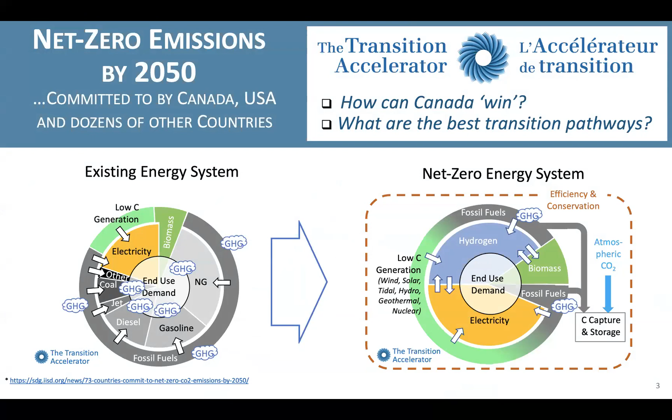I'd like to begin by just a word or two about hydrogen, why we're talking about hydrogen. I think we all know that Canada, the United States, and dozens of other countries have committed to net zero greenhouse gas emissions by 2050. And in the Transition Accelerator for the last 2.5 years or so, we've been trying to identify how Canada can win in transition to net zero, and what are the best transition pathways.

So when you look at the net zero emissions, and you look at the emissions we have in our existing energy system, it's pretty clear that a lot of the emissions, in fact the majority of the emissions, are coming from end-use carbon-based carriers like natural gas, gasoline, diesel, etc. And it's pretty clear that in a net zero future, it's going to be very challenging to continue to burn these kinds of energy carriers, putting greenhouse gas emissions into the atmosphere distributed across Canada. So we are going to have to change those energy carriers.

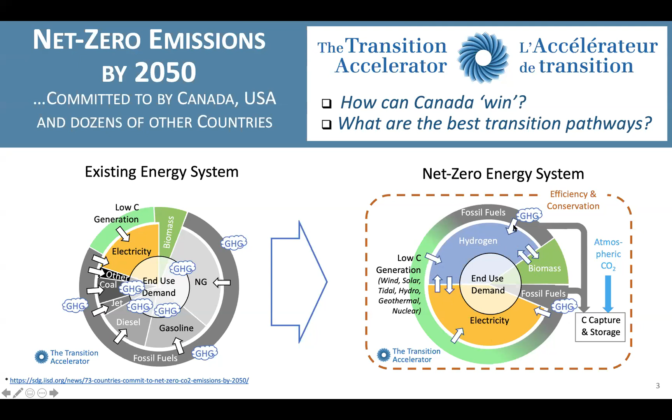The world is rapidly coming to a consensus that a net zero energy system will look something like a diagram on the right-hand side of this chart. A significant increase in the role of electricity as an end-use energy carrier, and an increased role for biomass perhaps. But the new one is an energy carrier that doesn't contain carbon, and that's hydrogen. These energy carriers, both electricity and hydrogen, have to be made with minimal or no greenhouse gas emissions.

So why hydrogen? Well, some sectors need chemical, not electrical, energy carriers. And Mayor Nenshi mentioned some of these: freight transportation, heavy industry like steel making, et cetera, and space heating in cold regions and large buildings.

Now often it's positioned that hydrogen and electricity are competing with each other for market share, and I would argue it's not that at all. What it is, hydrogen and electricity complement each other, because you can make hydrogen from electricity, and you can make electricity from hydrogen by splitting water or putting it back together again, by combusting the hydrogen. Hydrogen can also be very valuable long-term storage for energy, a non-carbon-containing energy store. Another benefit of hydrogen is that it can actually enhance your biofuel production and the productivity of biofuel production that you get from lignocellulosic biomass, for example.

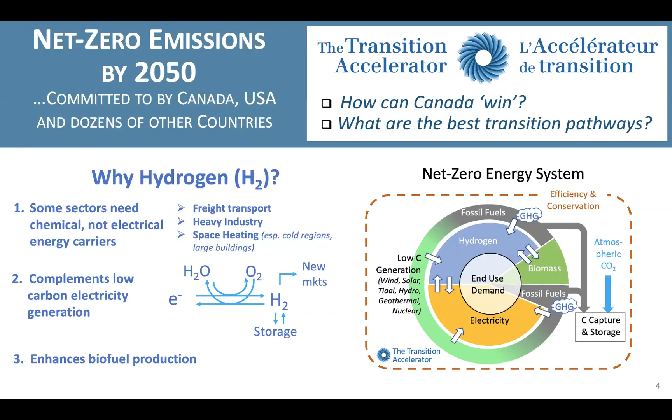So what I'd like to do then is move on and talk about how we make hydrogen, how we make it today, and how we envisage it being made in a new fuel hydrogen future.

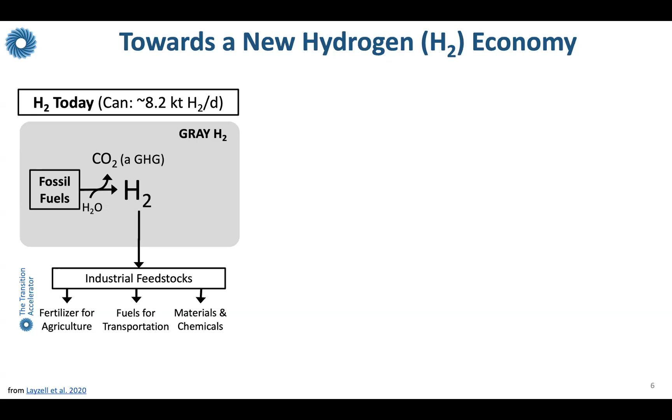Today, we actually make in Canada about 8,200 tons of hydrogen a day. It's made from fossil fuels, mostly natural gas. The carbon is released into the atmosphere, and the hydrogen is used as an industrial feedstock. It's used to make fertilizer for agriculture, it's used to make fuels for transportation, it's used to crack bitumen into synthetic crude oil and to convert various kinds of crude oil into gasoline and diesel. It's used to make materials and chemicals. And we produce a lot of hydrogen in Canada, but especially in Alberta.

In this new net zero energy system, we still envisage producing hydrogen, and hydrogen can be produced from a number of different sources, as long as the production of that hydrogen has very low or zero greenhouse gas emissions. We can produce it from fossil fuels and biomass, but instead of releasing the carbon into the atmosphere, as happens with what's called gray hydrogen, in a zero emission future we envisage capturing that CO2 and sequestering it. And of course, if the hydrogen is made from fossil fuels, you can make it with very low emissions. If the hydrogen is made from biomass, CO2 sequestration can actually give you negative carbon emission hydrogen.

It can also be made from renewables or nuclear energy, electricity, by splitting water, electrolysis of water to make hydrogen. And there are some chemical plants around Canada, mostly in the chlor-alkali area, making sodium hydroxide, that produce hydrogen as a byproduct. These would not only provide industrial feedstocks, but also provide export opportunities for Canada and hydrogen fuels to support transportation, buildings, and industry. And indeed, the hydrogen can be converted back into electricity, so you can see the hydrogen in this case would be kind of a storage, long-term storage for electrical energy, perhaps seasonal storage.

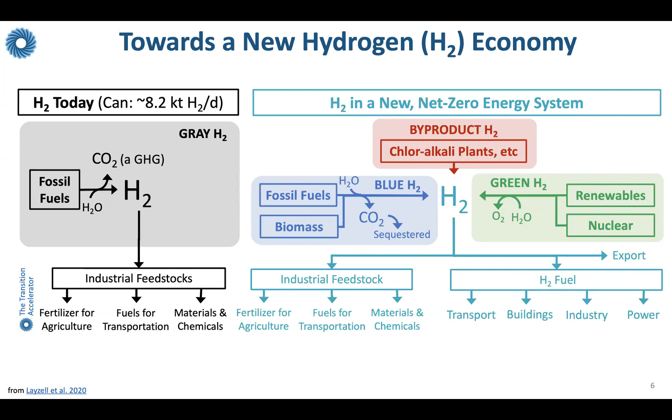Canada is actually very lucky because we're one of the world's lowest cost producers of blue and green hydrogen. This has been recognized by a number of countries who've looked around and said, where do we get hydrogen? A Japanese study a few years ago identified Canada as one of the lowest cost places in the world to make hydrogen. In fact, Alberta, BC, and Saskatchewan can make hydrogen at around $10 a gigajoule as blue hydrogen, and can make green hydrogen the lowest of all countries, because we have low cost electricity from renewables in places like Quebec and Manitoba.

If you look at the price, we can actually make hydrogen in Alberta at about half the wholesale cost of diesel, about a third the retail cost of diesel on an energy use basis. This opens up a very interesting and exciting opportunity for Alberta, in particular Western Canada, to get into the business of making hydrogen that would displace the diesel market. Indeed, the cost of green hydrogen production is coming down rapidly, and it will soon, in many parts of Canada, be able to compete very effectively against diesel at the wholesale and retail cost.

So we know that Canada has low-cost blue and green hydrogen, but what about its environmental footprint? When you do the life cycle intensity of blue hydrogen production, produced from fossil fuels with carbon capture and storage, this includes upstream emissions associated with getting the natural gas out of the ground, and the methane emissions that sometimes occur. It's about 3 kilograms of CO2 per kilogram of hydrogen. Hopefully this will come down with more regulation on methane emissions from natural gas extraction.

On green hydrogen, when you look at the whole life cycle of renewable production from hydropower plants, wind, or solar, the life cycle emissions are in the range of about 0.8 to 3 kilograms. Whether it's green or blue hydrogen, when used to displace diesel or gasoline in transportation, one sees a reduction in life cycle greenhouse gas emissions in the 80 to 95% range. When used to displace natural gas in buildings or industry as a heat source, it reduces emissions by 67 to 90%. So these are well on the way on a transition pathway. Hydrogen from either source is well on a transition path to net zero energy systems.

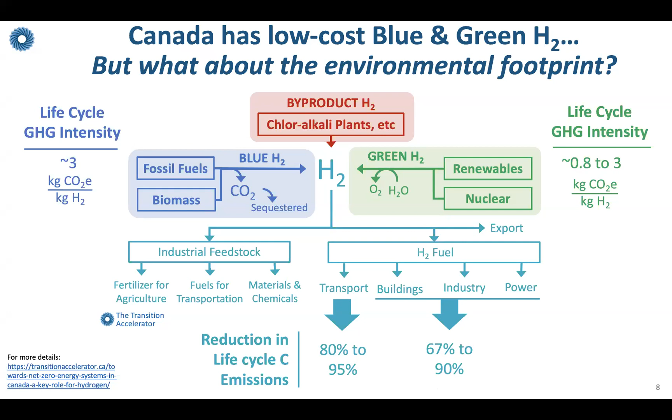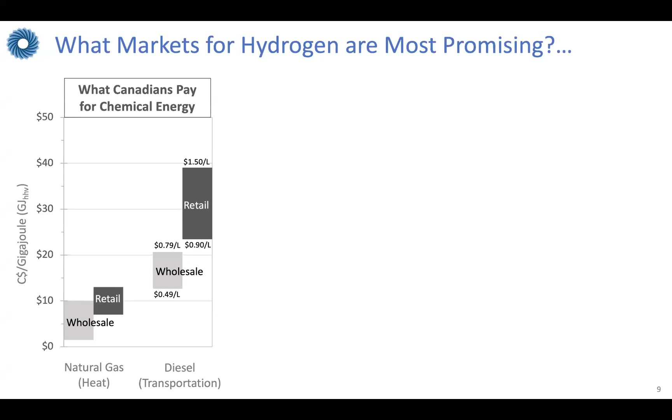In diesel transportation, wholesale prices are in this range, and retail is higher. So it's pretty clear that in our economy, transportation fuels have a higher value than heat, on an energy use basis. When you actually look at the cost of blue and green hydrogen production today, they're higher than what we'll be paying for natural gas as a heat source, but there's potential to meet the wholesale and retail markets for diesel fuel.

So in the transition to a net zero hydrogen economy, freight transportation currently holds the most promise to be economically viable in the short to medium term, especially if we can introduce hydrogen very efficiently into our economy.

However, I think it's also important to recognize, when thinking about a transition to a net zero energy system, that we need a solution for our heat sources within our economy. As you can see in some of the data presented, these are very large sources of emissions and large amounts of energy use. Hydrogen is likely to play a very important role there as well. We must think about the design of our energy system in the next 5 or 10 years to make sure it can also meet needs for heat, both in space heating and industrial heating.

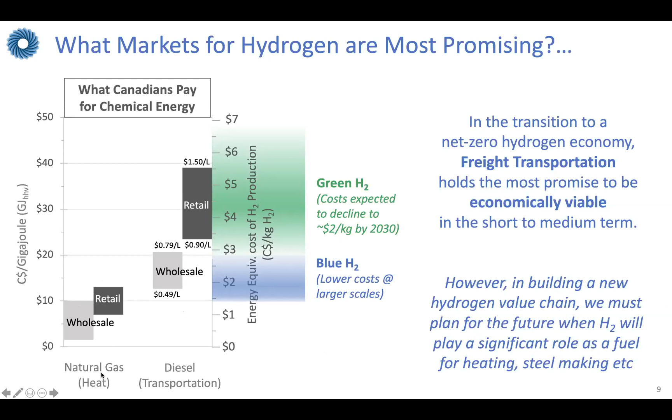So let's just talk briefly about the magnitude of the challenge and the opportunity in Canada.

And this is just one chart I'd like to show. What you see here is an estimate of the fuel hydrogen market potential in Canada.

This is the use of hydrogen as an energy carrier to provide transportation, space heating, industrial heat and power. Some calculations we've done suggest this is the current amount of hydrogen that's produced in Canada, not as a fuel, but as an industrial feedstock.

It's about 8,000 tons of hydrogen per day. The estimate in the diesel market across Canada, if 80% of this is met, these are only 2017 numbers.

Presumably the demand for transportation fuel will increase over the next 30 years, but just using 2017 numbers, we're looking at about 16,000 tons of hydrogen a day if 80% of the diesel market was met with hydrogen.

30% of the gasoline market is an estimate there, and the natural gas market for both space and industrial heating. So domestically across Canada we're looking at approaching 60,000 tons of hydrogen per day.

In Alberta, which is a major energy user as well, it's around 20,000 tons of hydrogen per day. On top of this, we have potential export markets. Countries like South Korea have said they're interested in importing from other nations.

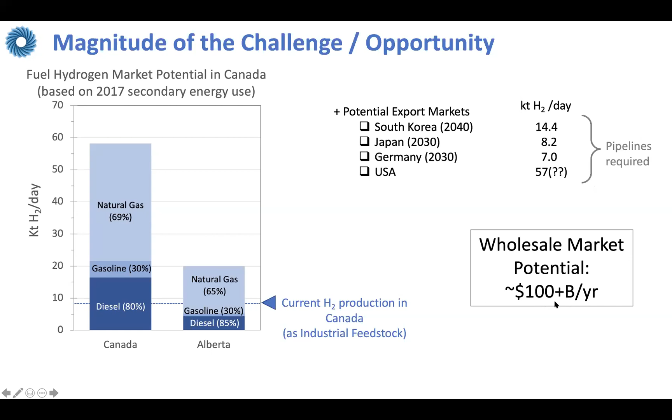So with all those good, promising things about hydrogen, I think it's really important to recognize the problem with hydrogen as a fuel. And I think this is really going to influence how we approach developing a net zero energy system.

And our focus on the Edmonton Region Hydrogen HUB. The problem with hydrogen is it's a gas, and therefore it's a lot more difficult to move and store than liquids, especially if you try to do it in relatively small quantities.

So the take-home message here is go big or go home. We have to get to scale. And if we don't get to scale, it's very difficult to make the economics work.

So what we must do with building hubs across Canada, and we're looking at Edmonton as an early place to start, is to focus on places where we have low cost, bringing together three things: low cost waste, blue and green hydrogen.

Identify substantial nearby markets for that hydrogen, especially in the transport market, which should be economically viable sooner, but also in the heating fuel market, where it can provide some valuable backup for transportation, as we will talk about.

We also need the ability to connect the two. Ideally, as you'll see, we're seeing pipelines as being the place where we need to go, but perhaps in the early stages, we can't quite get there.

And then fourth, we need a scale of supply and demand where the economics works without sustained public investment. And of course, to bring all this together, we need engaged industry, we need engaged governments and academics.

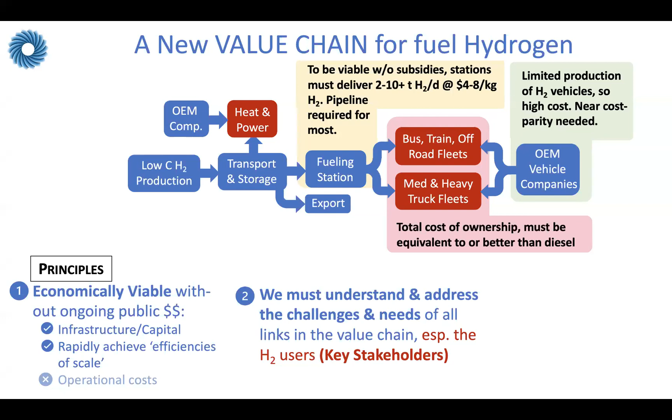On the fueling station side, in order to be viable without ongoing subsidies, fueling stations must be able to deliver in the range of 2 to 10 tons of hydrogen per day, at about $4 to $8 a kilogram for heavy trucking and buses, et cetera. And in order to achieve this, we're going to need pipelines, and we'll show you some more evidence on that later. In the interim, we may not be able to go to pipelines right away in many cases, but we have to move towards pipeline distribution of gases as quickly as possible.

On the production side, to be viable, green hydrogen needs low-cost power, and figuring out where you're going to get that really low-cost electricity is critical for green hydrogen production. Blue hydrogen needs scale in the hundreds of tons of hydrogen per day in order to cost-effectively make blue hydrogen. On the transportation and storage side, that brings this all together.

Compressed and liquid hydrogen are really expensive to make, move, and store, but they may be needed in the shorter term with smaller systems. Pipelines, though, only work with large volumes, so we have to plan that reality into the deployment strategy.

Then the last two here, export market opportunities, as I've already mentioned, are quite substantial. We really need a deep market understanding and engagement with export markets, and that's going to be important to think about how we could piggyback on export markets. Obviously they're going to require pipelines, and how we can actually piggyback on export markets to also provide our domestic markets is something that should be considered.

And heat and power use - hydrogen may be the best alternative, as I've mentioned before, but the costs are high relative to natural gas. So we have to think very carefully about how we deploy hydrogen into heat and power demand. Clearly it's going to need pipeline delivery of hydrogen, but it has to be done in sequence to keep the costs down.

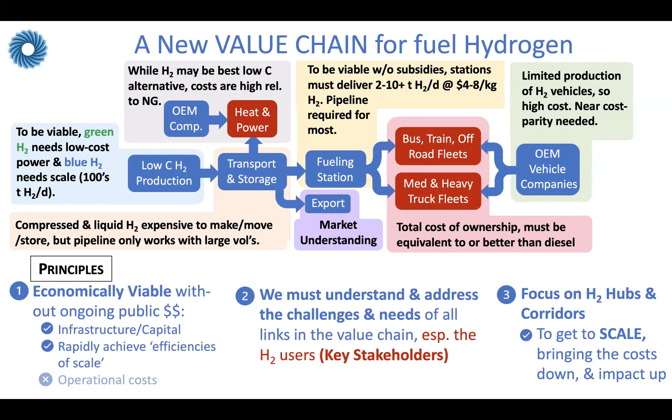And finally, one of the last principles here is that in order to pull all of this together - and this is why I emphasize the importance of the value chain and doing it concentrated in certain regions of Canada - it's a very complex system. We're building a new value chain. So we need to focus on concentrated areas, hubs, and corridors to allow us to get to scale that will bring the cost down and the overall impact of public money up for transforming our energy system.

So why have we chosen Edmonton as a place for a hydrogen hub? This is work that we've done over the last 3 or 4 years, and really Edmonton came out as the place to get started on a large-scale hub.

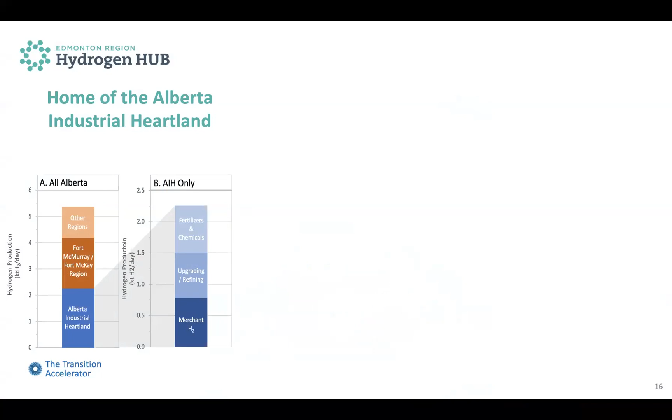This is because of the home of the Alberta Industrial Heartland. The Alberta Industrial Heartland produces approximately 40% of all the hydrogen produced in Alberta, and it occurs in a region to the north and east of Edmonton, and to the northeast through Fort Saskatchewan and a number of the counties. Mayor Nenshi is mayor of one of those counties, Strathcona.

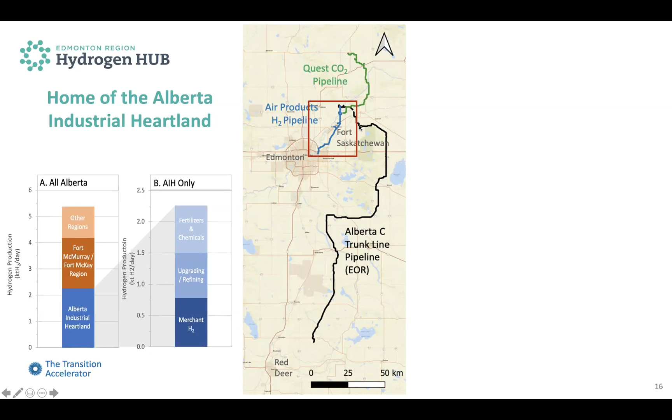And in this region already today we have a hydrogen pipeline. It belongs to Air Products. It's a 50-kilometer long pipeline. There are also 2 CO2 pipelines. These already exist today, and all of them are in use today.

There are a number of different companies along this pipeline and affiliated with it, but also in other areas in the region that are producing hydrogen. Some of that hydrogen being produced by 3 of the companies here is already blue hydrogen, low cost, where the carbon is being captured and put into these pipelines.

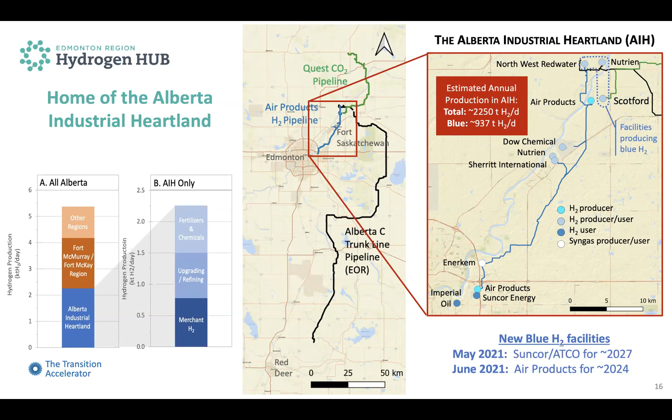As Mayor Nenshi mentioned in the introduction, in the last month or so we've had an announcement by Suncor and ATCO for plans to put in new blue hydrogen facilities, by 2027 in their case. And just in the last week or so, Air Products has announced a major blue hydrogen facility they hope to bring online by 2024. These will really help anchor this as a source of hydrogen used not only for industrial feedstocks and to decarbonize our existing production system, but also as a fuel for an energy future.

So the high-level strategy we've been developing for the Edmonton region is to piggyback on the industrial production that's already occurring and may increase industrial blue hydrogen production, pipeline it to rapidly growing hydrogen demand in transportation markets for trains, trucks and buses, for domestic heating, industrial heating, possibly for power generation. This same infrastructure could be used to pick up green hydrogen production or other blue hydrogen production and help bring it to the marketplace.

We can produce this hydrogen at approximately, with carbon capture and storage, around $1.50 per kilogram. The idea is to deliver it in the $3.50 to $7 per kilogram range for transportation fuels, and around $2 per kilogram for space heating. With carbon taxes going up, the price could be even higher. Liquid hydrogen is another way of delivering that, and it could rapidly increase demand remotely, but that's going to require more subsidies because it adds significantly to the cost of the hydrogen.

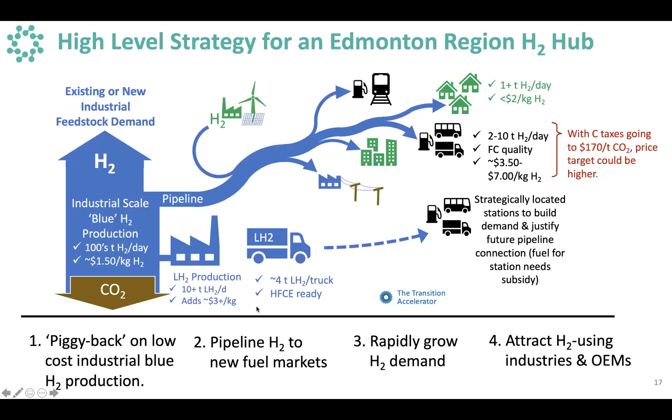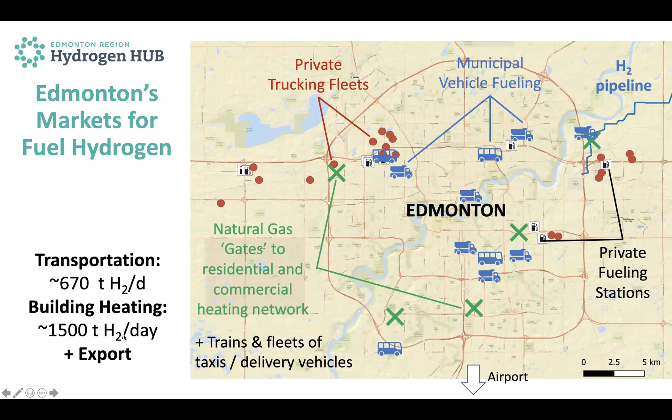We know Edmonton has a lot of potential demand areas, and we've estimated this to be demand for around 670 tons of hydrogen per day for transportation, for building heating in 1,500 tons a day, plus export. The real issue then is how do we get there from where we are today?

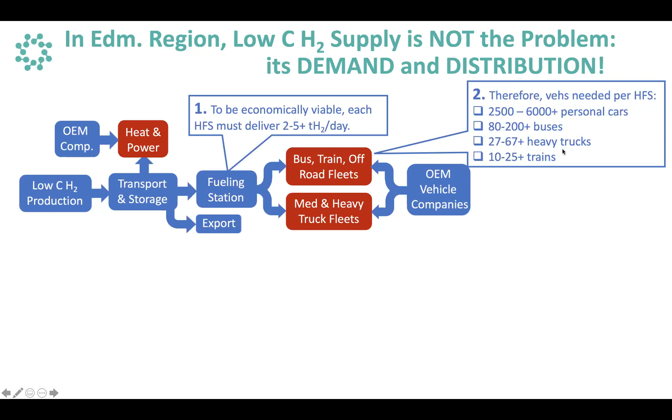We're going to need 80 to 200 buses -- that's more feasible, especially if you're dealing with fueling stations within municipal bus fleets. We're going to need about 27 to 67 heavy trucks, because they use a lot more hydrogen than a personal car, or 10 to 25 trains.

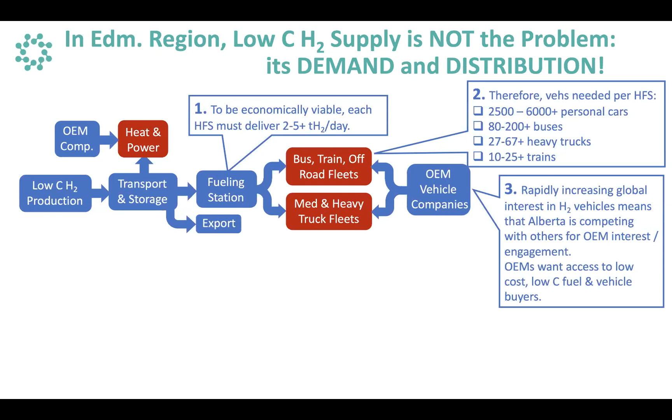One of the other things to recognize is that the OEM vehicle companies are really running flat out right now. There's a rapidly increasing global interest in hydrogen vehicles, and that means Alberta is actually competing with other jurisdictions around the world for OEM interest and engagement. We don't have any OEMs here now making hydrogen vehicles, so we need to bring them in from other jurisdictions. What OEMs want is access to low cost, low carbon fuel, and access to vehicle buyers.

You can have hydrogen delivered as a compressed gas, as a cryogenic liquid at very low temperature, or in a pipeline. The compressed gas is really good for pilots and early demos when you have really low volume.

Liquid hydrogen can take over in some cases. This is really good for growing small markets and maintaining them. You can transport it a long distance, but the price is still reasonably high, driven up by the cost of liquefaction and moving it around.

The sweet spot exists only when you get to large volumes and longer distances, when you start moving hydrogen in pipelines. But we need to be talking about many tens of tons per day and hundreds of tons per day to make it work.

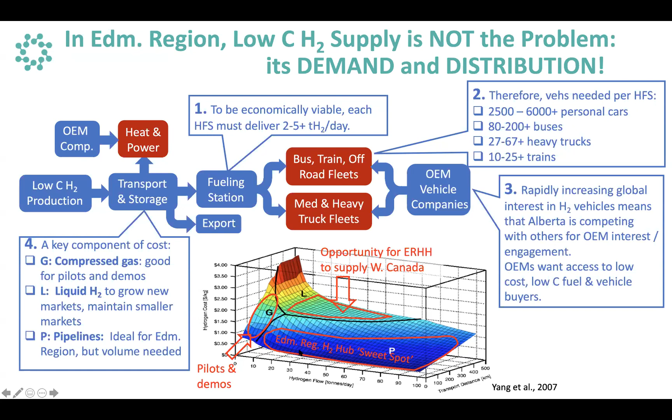This is kind of the sweet spot for the Edmonton region if we can get to scale. So let's talk about the scale of ambition for fuel hydrogen.

In a couple of charts, I'll show you what we're thinking about in terms of heavy freight - Class 8 trucks. We're only looking at Class 8 trucks here, not buses, trains, light or medium duty vehicles, off-road vehicles, residential or space heating, or power generation. We're just focusing on one sector, Class 8 trucks.

These are the kind of trucks you see driving on the major highways. They account for about 35% of diesel use in Alberta. There are 110,000 registered vehicles in the province, but we've done a detailed analysis of this population and found that the youngest 50% of these vehicles use about 90% of the fuel.

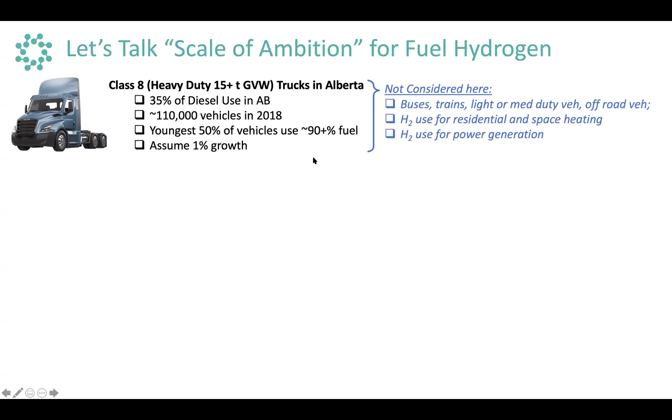That's actually good news for us - we don't have to change over the whole fleet, just the younger vehicles, and we can capture most of the fuel use. In our models, we've assumed a 1% growth in this sector over the next 30 years.

So what we're looking at here is what's possibly achievable. We looked at two different models, a more conservative and a more aggressive one, for what would be needed to achieve the transition of this sector.

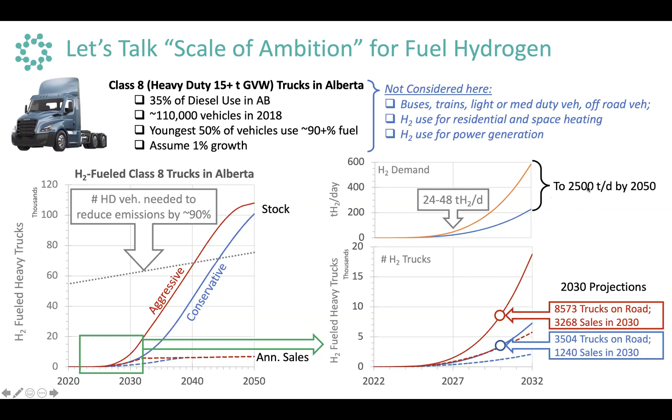But by the time we get to 2050, we're up over 2,500 tons of hydrogen per day. That is more than all of the hydrogen produced within the Edmonton region today.

So when we look at this kind of energy transition, I think it's important to recognize that there are different phases. We are here now, just into 2021. Obviously, we need to be looking at pilots and testing. There are none of these heavy duty trucks, or even hydrogen fuel buses, on the road in Canada today. So we need to do some piloting and learning to test and learn in the real world.

We then need to move to demonstrations. Once we know a vehicle works, we need to get out and show it to the key stakeholders that are going to be buying and using these vehicles, to prove and build interest and confidence. We need to move then into rapid commercialization to get the early adopters and industry leaders to help move forward, and then full deployment so it becomes the highly competitive choice for moving into the future.

So what I'm going to do is look through each of these pilots, demonstrations, etc., and give some examples of the kind of work we're already doing, or what we'd like to be doing, in building out a hydrogen economy.

I think one example of a pilot already mentioned is the AZETEC project. It's one we started with a number of different partners a couple of years ago, to design and build two of these heavy duty trucks. These are very heavy duty, 63.5 ton gross weight. They're going to be on the road about a year from now, in Q3 2022, running the Edmonton to Calgary return trip, 700 kilometers between refueling. This has been funded with Emissions Reduction Alberta and Natural Resources Canada.

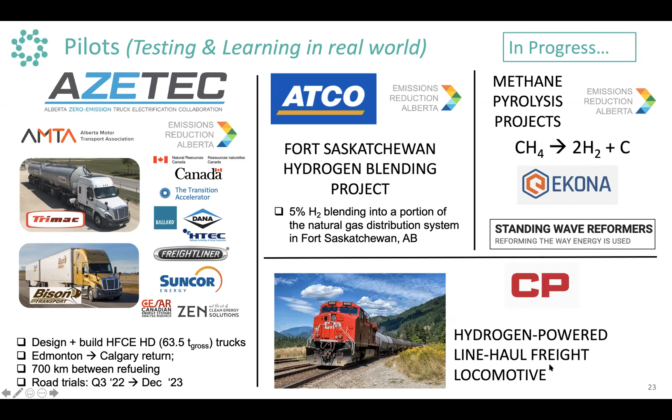CP, we've all heard about CP's announcements in the last 3 or 4 months of them building hydrogen-powered line haul freight locomotives. These are great pilots, really important, in progress today. We would love to see, and we're working to try to see, other pilots being brought online, like a hydrogen diesel dual fuel technology.

This is basically a retrofit of diesel engines to take somewhere between 30% to even 60% or more of the fuel energy from hydrogen. We see this as an important bridge technology to really build out hydrogen demand at the fueling stations and help us get the more aggressive curves we've talked about on the previous charts.

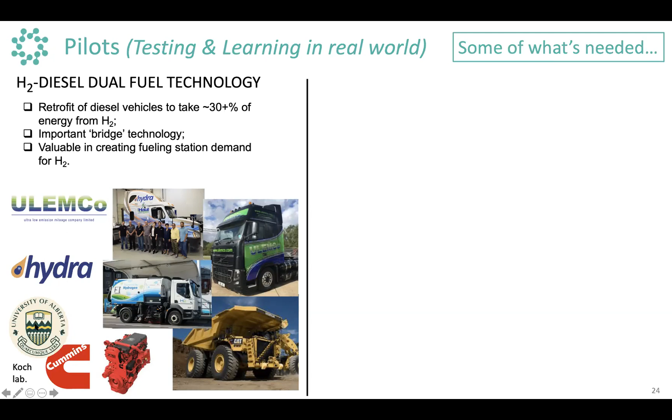There's a UK company already doing this, Ulemco. There's a seminar later this week with them, if anybody's interested. There's a company called Hydra from Vancouver trying to develop a similar technology. And the University of Alberta, with the Koch Lab, working with Cummins, is developing a technology that we're very excited about and very supportive of seeing move forward.

There's a wind and solar to hydrogen fueling station concept, the possibility of actually creating the hydrogen right on the site where you need fueling stations, especially in remote areas across Canada, say on Highway 1, where you could put wind and solar and hydrogen together into a fueling station. The Hamid Zareipour lab at the University of Calgary has been doing a lot of work in this space and is really interested in identifying industry partners to try to bring through some pilots for this in the next few years.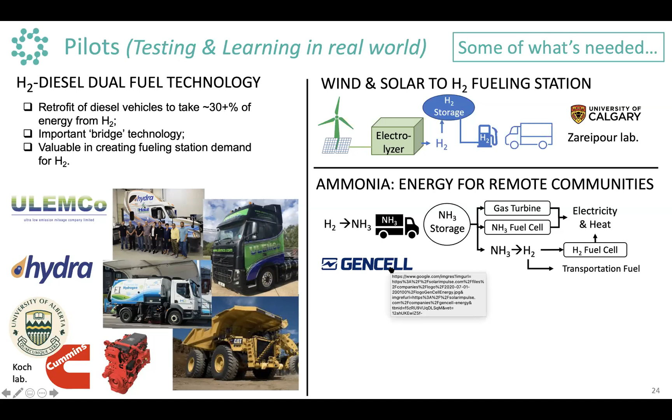There's another possibility of ammonia used for energy for remote communities, since hydrogen is used as the main energy input to make ammonia, which can be trucked around and stored relatively easily. Indeed, there's a lot of technology being developed, especially in Japan and South Korea, for converting ammonia into electricity, either through fuel cells or even converting ammonia back to hydrogen again, which could provide a transportation fuel, heat, and electricity. I'd point you to Gencell Energy, an Israeli company you might want to look up, which has an interest in remote, off-grid communities, and this provides an interesting decarbonization strategy.

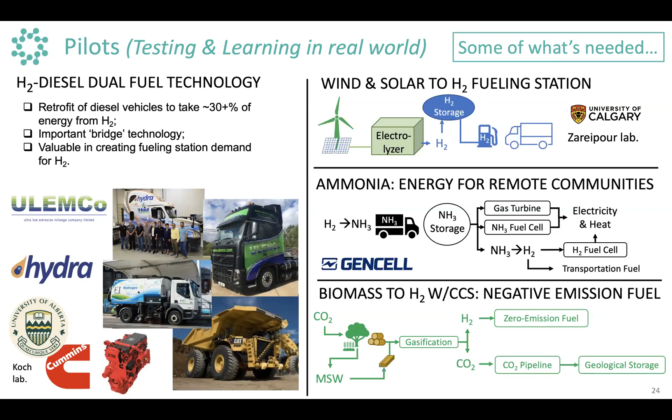Biomass is another option, possibly for remote communities but also municipal waste areas, where we can take biomass and convert it to hydrogen, but ideally couple that hydrogen to carbon capture and storage, so you actually get a negative emission fuel. This technology could easily be deployed in the Edmonton Municipal Waste Center, or in remote communities. There are a number of companies in Edmonton, Alberta, and other parts of Canada interested in this. These are the kinds of pilot projects I think would be very valuable, and we need to be moving on those quickly. I hope we'll hear more announcements in the next few months about some of those demonstrations or pilots going forward.

Now let's look at some demonstration projects. This is more or less proven technology that needs to be brought out and introduced to companies to get them interested, creating hands-on experience. There's already commercially available now, Toyota Mirais. These might not be so valuable in a hydrogen economy for personally owned vehicles, but say fleets of Toyota Mirais used as a taxi fleet, driving many tens of thousands, even 100,000 kilometers a year, you can get the hydrogen demand up and the economics to make sense.

New Flyer buses are available now. Hyzon trucks, heavy duty hydrogen fuel cell trucks, are supposed to be available later this year, and Nikola in 2022. Hyundai trucks are being sold now in South Korea and in Europe, and we're trying to find a way of getting them moved to North America for deployment here. To realize this, we need engaged prospective vehicle owners and users like municipalities, AMTA members, and Alberta Motor Transport members, who seem quite interested in these.

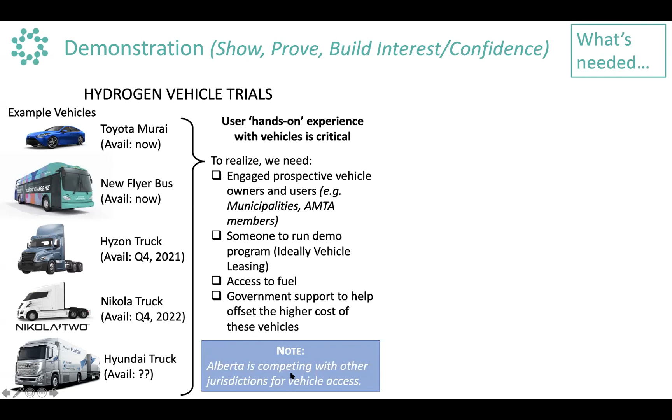We need somebody to run a demonstration program to actually run these, and we're working with a number of partners on this. We need access to fuel, of course, and we need government support to help offset the higher cost of these vehicles. And in Alberta, as I mentioned before, we're competing with other jurisdictions for vehicle access. Access to fuel is a really important one.

I think what's needed, especially at this demonstration stage, as we move out over the next decade or so, it's really going to be important to develop and implement some mobile fueling stations. Where we can take hydrogen, if you compress the hydrogen and move it, the fuel gets quite expensive, $20 to $25 a kilogram using this pathway.

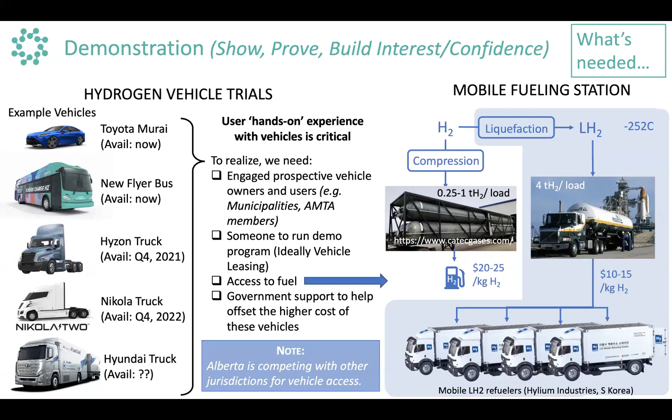But with liquefaction to liquid hydrogen, and the new Air Products announcement talked about making liquid hydrogen — this is an Air Products liquid hydrogen truck, I actually used to fuel the space shuttle, back here in the background — this hydrogen you can get down to perhaps the $10 to $15 per kilogram range. The idea is, there are some mobile refuelers being developed that are liquid hydrogen based. Something like that could be deployed within Alberta and actually in all Western Canada to provide fuel. Perhaps fuel made in the Edmonton industrial heartland could be provided to Western Canada to do some demonstrations and get companies interested in these vehicles as a pathway to a low carbon future.

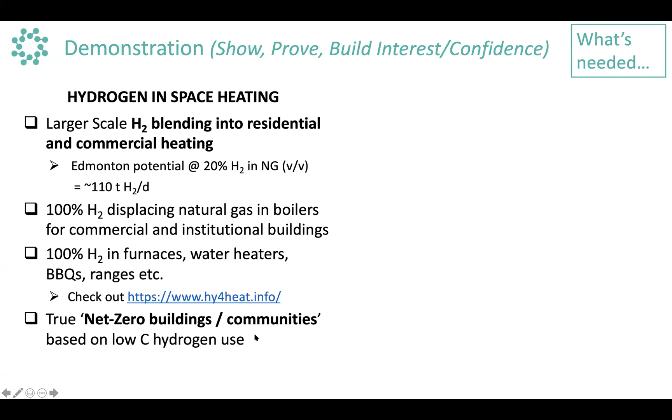We also need to look at hydrogen in space heating. We see the Edmonton potential here for a 20% blend is like 110 tons of hydrogen per day. This would not require any infrastructure changes within houses, et cetera — very limited. There's a possibility we need some demonstrations of hydrogen in natural gas boilers, commercial and institutional buildings, water heaters, barbecues, ranges. This is being done, and there's a website that links to what's being done in other countries in this space. And possibly creating new net zero buildings or communities based on low carbon hydrogen use in those buildings.

We need to also look at the demonstration of hydrogen in power generation, small scale, or even gas turbines. There are a number of companies now producing hydrogen gas turbines that could be tapped and demonstrated for larger scale expansion within Alberta, within the Edmonton industrial region, with the Edmonton Region Hydrogen Hub.

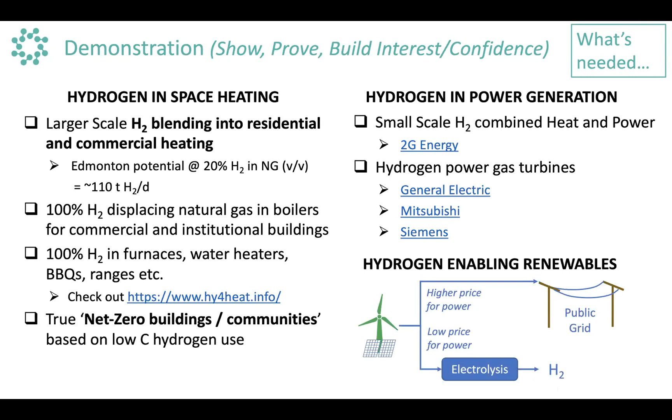And of course, hydrogen enabling renewables. This is quite an important area, the possibility of wind and solar — if the price is high, you put it on the grid. As we deploy more wind and solar in Alberta, the price often drops for the electricity. Maybe that's a time to switch and start making hydrogen. I think this opens up new economic opportunities for large-scale wind and solar distribution within the province, because the wind can actually be made into hydrogen, and especially if we had some other infrastructure to get that hydrogen to market, it would be, in our calculations, an economically viable solution.

Finally, commercialization, about ready to wrap up. One of the things on commercialization is to really look at how do we get this system deployed at scale and moving forward quickly. We know we want to make the Edmonton hub the most attractive place in North America, perhaps in the world, for commercialization of the vehicles.

We need access to low carbon hydrogen. We need pipelines for distribution and a significant scale of demand. We know where the fueling stations are. We know where the natural gas gates are for distribution, power generation opportunity, and commercial institutional space heating.

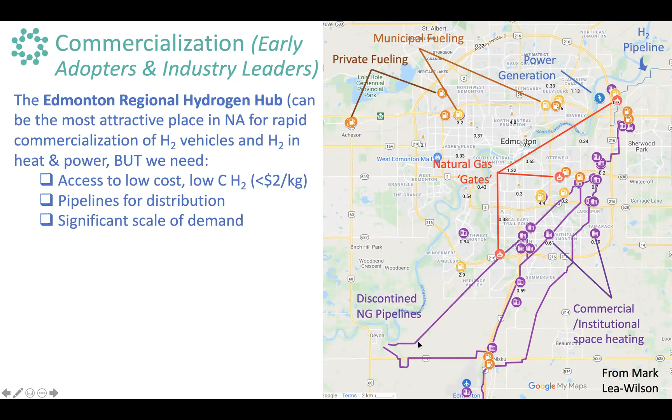We even know where the discontinued natural gas pipelines could be repurposed, and the possibility of developing, over the next 8 to 9 years, estimated amounts of demand for municipal fueling stations, for heavy truck and train refueling, for space heating, for power generation, and for export to other regions and jurisdictions, both within Alberta and outside.

And indeed, if we're actually looking at export pipelines, the limit almost does not exist, as noted before, in what other countries would like to import from Alberta and from Canada.

So hydrogen pipeline infrastructure is essential here. It's essential, we would argue, to make the Edmonton Regional Hydrogen Hub a world-class hub. It complements and follows the compressed or liquid hydrogen, which is needed in the early stages, to grow out and bring hydrogen to other communities that don't have the opportunities that Edmonton has.

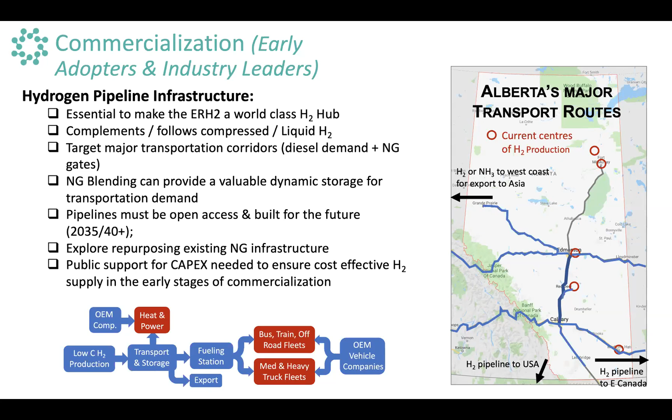With these sort of guidelines, this is a key part of a build-out of a robust hydrogen economy within the Edmonton region. We feel that by doing pilots, demonstration, and commercialization, we can rapidly get to deployment. We're hoping to see commercial full deployment without ongoing public subsidies very rapidly in this region, if we put in the commercialization stages early.

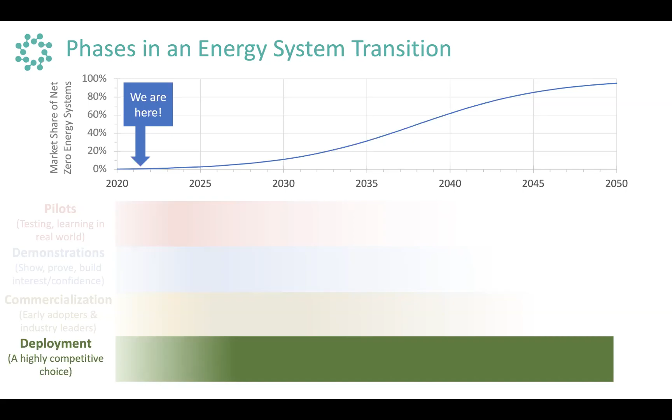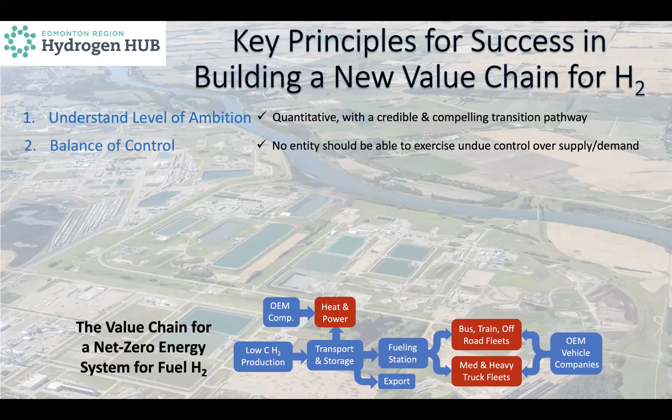So finally, just to touch on, at a high level, some key principles for success in building a new hydrogen value chain. Let me jump to the right one here.

First of all, we've got to understand the level of ambition. We need a quantitative understanding of the level of ambition with a credible and compelling transition pathway.

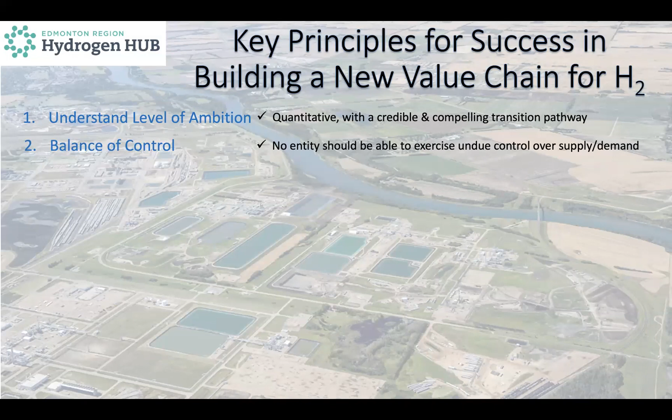Second, we need a balance of control, to make sure we build a new value chain where no single entity should be able to exercise undue control over the supply and demand. It has to be balanced control over the value chain.

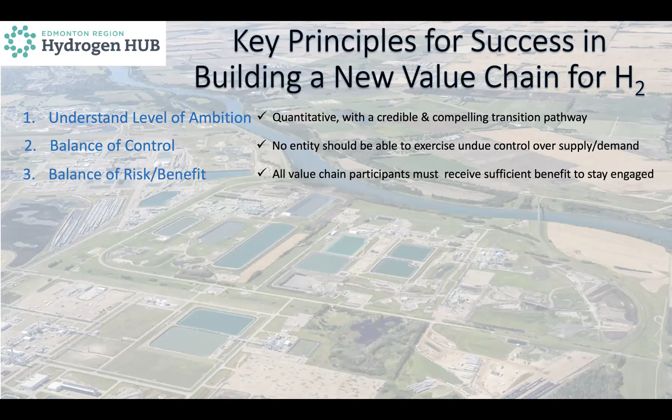There also has to be a balance of risk and benefit, so that all value chain participants must receive sufficient benefit to stay engaged.

It needs to be economically viable without ongoing public investment. So we see CapEx preferred to OpEx, and carbon pricing is important, but also support getting to scale so that costs can then decrease. Regional fit is important.

We have to fit these hydrogen hubs to their unique characteristics. We're certainly doing that in the Edmonton region, but we see opportunities in other parts of Canada, looking at supply, demand, delivery, and workforce.

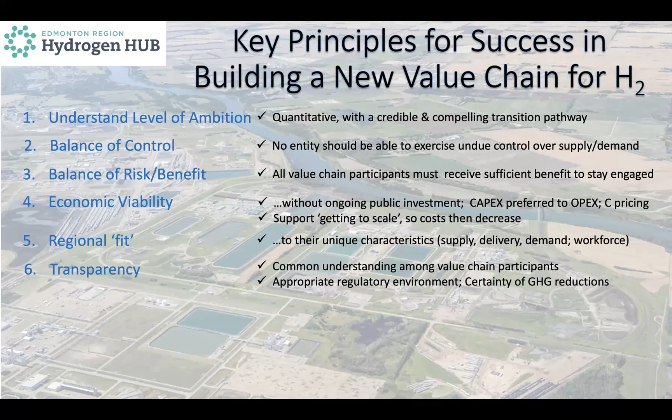Transparency is really important—there needs to be a common understanding among value chain participants, an appropriate regulatory environment, and certainty of greenhouse gas reductions built in. Finally, we need to harness public sector competitiveness.

So in conclusion, zero emission hydrogen production, use and export represents a huge opportunity for Canada. As a major producer of hydrogen today, the Edmonton Region Hydrogen HUB is ideally poised to lead, but we need a coordinated value chain to guide both policies and the allocation of public and private dollars. We need a similar value chain approach to be used by virtually all new hubs, to ensure we create an economically viable system that remains when the public funding stops. Thank you very much.

Very happy to entertain questions and discussion.